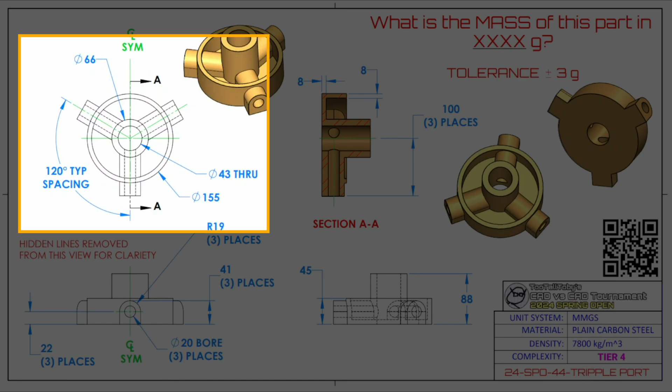We're going to build one of those first, and the easiest one to work off of, based on symmetry, is this vertical one over here. We'll build this one by looking at it from the front perspective, and then use the circular array tool to make 2 other copies of it.

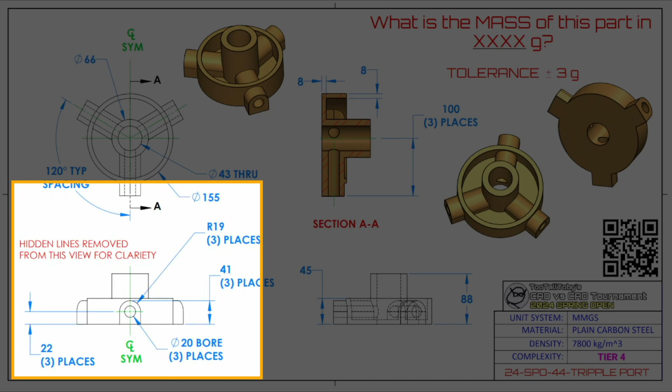If you look at it from the front view, notice it also has this rounded shape with a radius of 19. The easiest way in Plasticity to build these kinds of shapes is to use a rectangle tool, then fillet the corners. So that's what we're going to be doing over here.

So once that's done, extrude one of the spokes, use the radial array to make 3 of them, and then just add the holes from the top and from each of the spokes, and that'll be the end of the model. So with that in mind, let's get started.

The first thing we're going to do is switch to the top perspective. My shortcut is Control-2, but that's a custom shortcut. If you need to know how to switch to the top perspective, you can always access it using the search menu by pressing the F key and searching for 'top'. Here we can see that 'viewport navigate to top' is what we want, so that's what we're going to do.

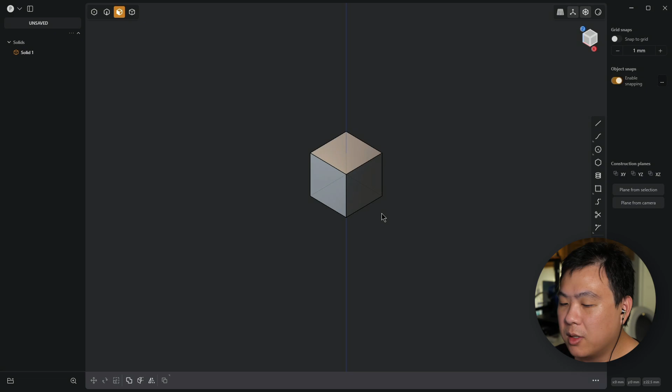First, clear the solid from the scene and switch to the top perspective. Here we're just going to enter in all of the circles that we see. Using the center circle tool from the side, click on the center circle tool, click on the origin, then press tab and enter 66 as one of the circles.

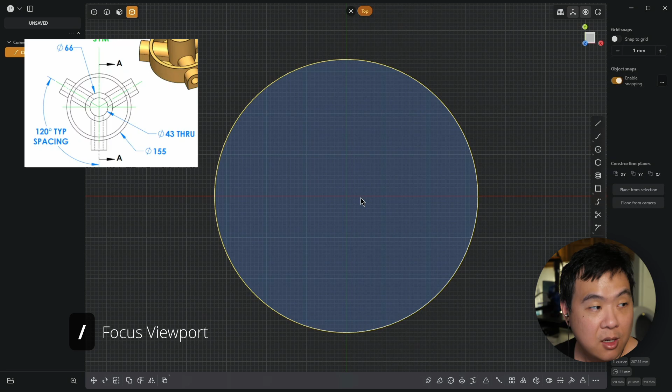I'm going to press / now to zoom in because it was a little too small. Now zoom out, and using the center circle tool again, define the outer ring, which is given a diameter of 155. Press tab and enter 155, then enter twice to confirm.

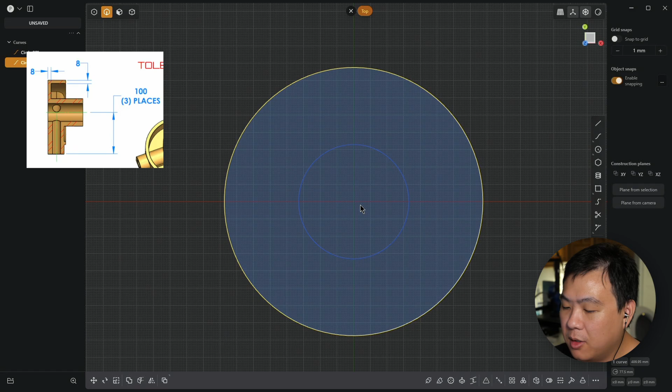We're not given the diameter of the inner ring directly, but from this separate view, we're given that there's an offset or shell of 8 millimeters — offset from the outer shell or outer circle. Switching to edge selection mode, press 2 or use this top left button. Select this shell, press O for offset, D for distance, and enter 8. Notice how it's going in the wrong direction right now — it's offsetting outwards, whereas we want to offset inwards. To fix that, we press the minus key, which flips it in the other direction, then enter twice to confirm.

And then the last thing is we also want this 43 diameter through hole.

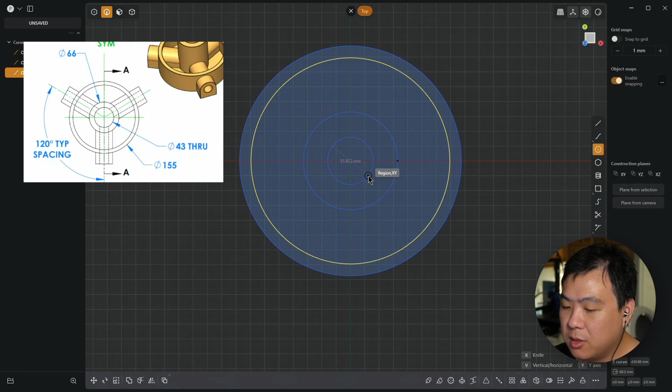So we're using the center circle tool right from the origin, press tab, enter in 43, and then enter twice to confirm. Now to start extruding, what we're going to do is create this 8 millimeter floor.

To do that, I'm going to use face selection mode. I'm going to select these inside faces, press D for distance, and enter 8. Next thing is this outer ring over here.

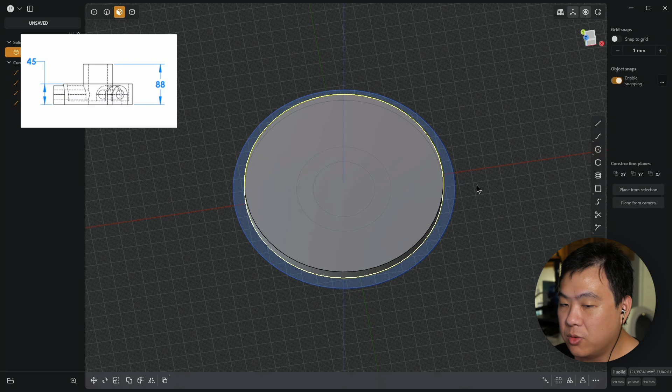From the side profile, we're given that this ring is of height 45. So using face selection again, I'm going to select this outer ring, press D for distance, and enter in 45.

Now I'm just going to rotate to the bottom view so I can select these two inner faces over here. We're going to extrude that inner cylinder. So in face selection, I'll select these two faces and press D for distance. We're given that there's a height of 88, so I'm going to enter 88.

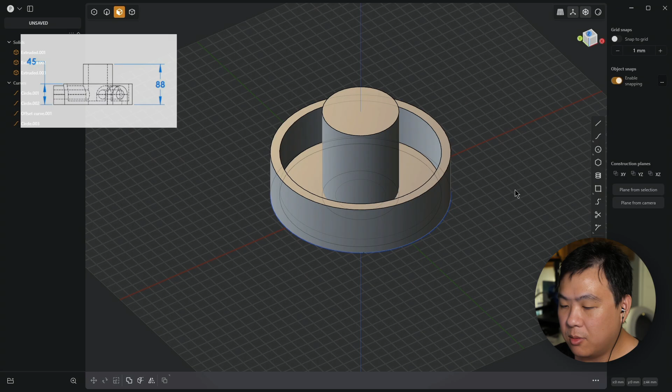And that's pretty much our main shape. So before we move forward, I'm going to press A to select all of our solids, Q for Boolean, Q for union, and right click to confirm. I can now select all of the curves over here and press X to delete them.

Now what we're actually going to do is hide the solid and switch back to the top perspective. Now we're going to construct one of the spokes. Like I mentioned before, we're going to do the one that's vertical.

The easiest tool for me, if we were to do this in a speed modeling competition, is to notice that it sits right along this origin over here, where it's split in half by the y-axis. So the easiest way to make that would be to use the center rectangle tool.

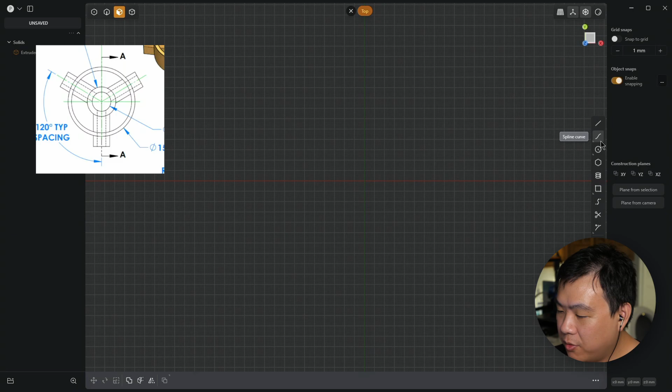Over here, where the corner rectangle is, press on this tool, click on the origin. But notice how on the bottom there's a shortcut that says C to switch from corner to center. So I'm going to press C to make it a center rectangle.

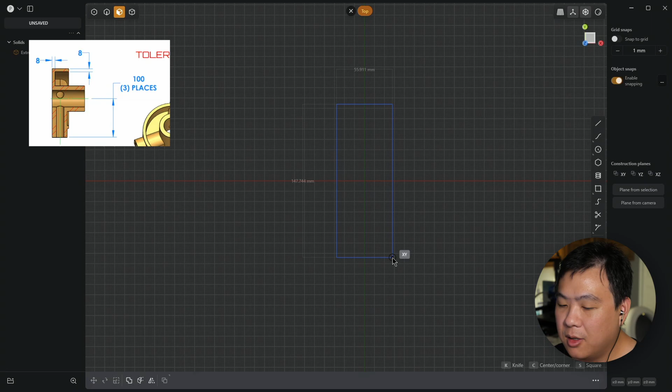Here we're given that from the origin, there's a height of 100. But since we're dealing with the center rectangle tool, we need to double that amount. So press tab and enter in the height of 200 instead.

Now for the width, we're given that there's a radius of 19 for those rounded corners. This just means that if you were to draw a circle, 19 would be the radius. But that also means that to get the full width, 2 times the radius would be the diameter, which is the width we need. So here we just enter 19 times 2, or we can enter in 38, and then press enter twice to confirm.

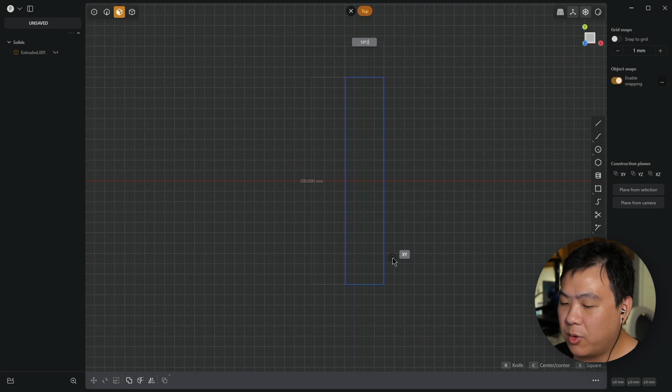Now, I only use the center rectangle tool because it helps us get it into the correct place faster, but we really only want to deal with this bottom half.

So just using the line tool over here, or Shift A, we'll select the line tool and right on the x-axis, I'm just going to cut this rectangle in half. I'm just going to use this half over here.

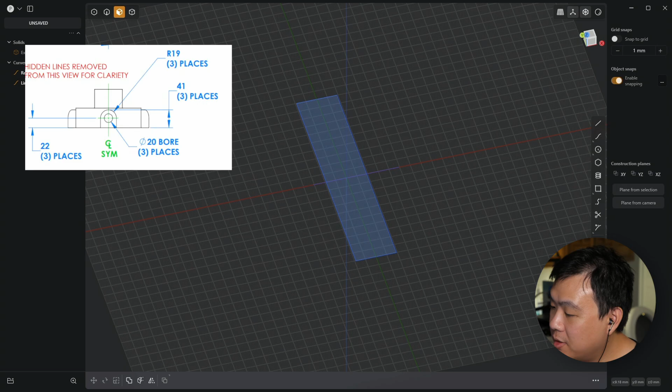Here we're given that, if we look at this view over here, the height of this is 41. So using the face selection tool, I'm just going to select the bottom half of the rectangle, press D for distance, and enter in 41. Press enter twice to confirm.

I can now unhide that other solid that I have. And this is sort of what we need, but we need to make those rounded edges, of course.

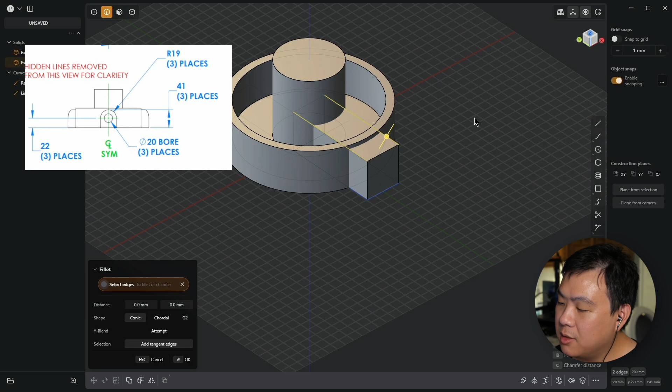So switching to edge selection mode, or 2 for the hotkey, or you can press on the button up here for edge selection, select these 2 edges and then press B for fillet, D for distance, and enter in 19. And that gives us our shape.

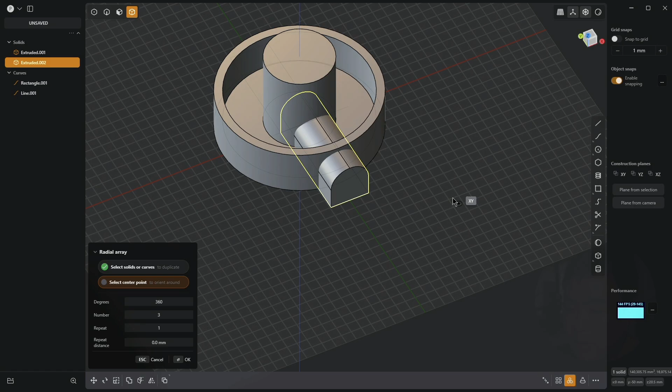Now what we need to do is use the radial array in order to produce 2 more copies of this. So using the object selection or body selection, or press 4 as the keyboard shortcut, I'm going to select the spoke, and then on the bottom right over here, there's this radial array, and press on that button. I'm going to select the Z-axis, which is what I want to revolve around.

Notice that mine's already at 3 because I built this model before recording this video, but the default might be 8. So here you just need to hold down, as indicated on the bottom right over here, Shift and then your mouse wheel down to subtract, until you get 2 additional copies, and then left click and right click to confirm.

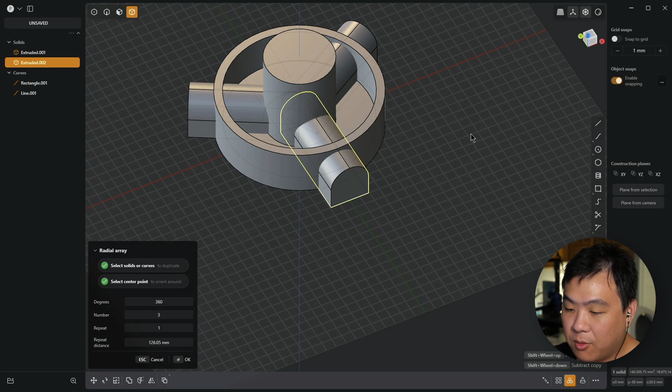So now before doing anything, I'm going to select all of the bodies and Boolean them together. Press A to select all of the solids, Q for Boolean, Q for union, then right click to confirm. Now notice that you have 1 solid.

The next thing we're going to do is create that 43mm through hole on the top. Using the center circle tool, hover over the center of that top face until the white outline is shown in the middle cylinder. Click, press tab, enter in 43, then press enter twice. Once you press enter twice, the circle is automatically selected.

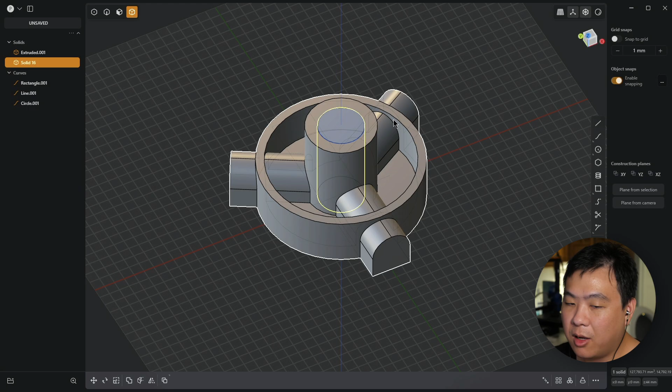With the circle selected, I'm going to press C to enter the cut menu, select the body we have, and then right click to confirm. Once that operation is done, it cuts this inner cylinder out from the solid and has it automatically selected. So with the cylinder selected, just press X to delete it.

Now the last thing is to make these through holes from these spokes. Switching over to the front view, I'm going to use the center circle tool again, making sure it's aligned to the bottom of center, because we're given that we need to create a 20mm diameter bore, offset from the bottom by 22mm.

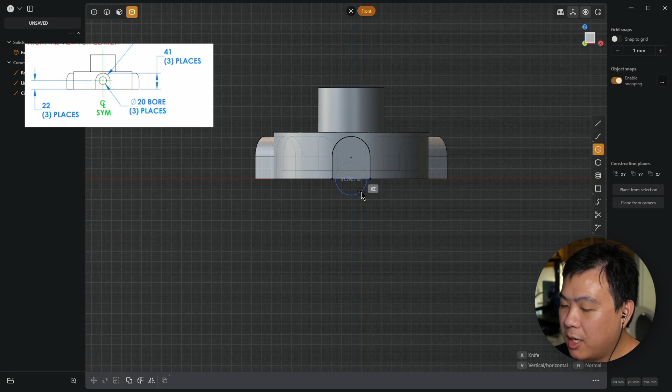So we're going to start off at the bottom center, click, drag, then press tab and enter in 20. And then we also need to move it up 22mm. So press G to activate the move tool, Z to lock into the Z axis, enter in 22, then press enter twice to confirm.

Notice how the face is not blue right now. That's because right now it's aligned to the origin. We actually want to move it onto this face first. And then the quick way to get 2 more instances of that is the tool we used before, the radial array.

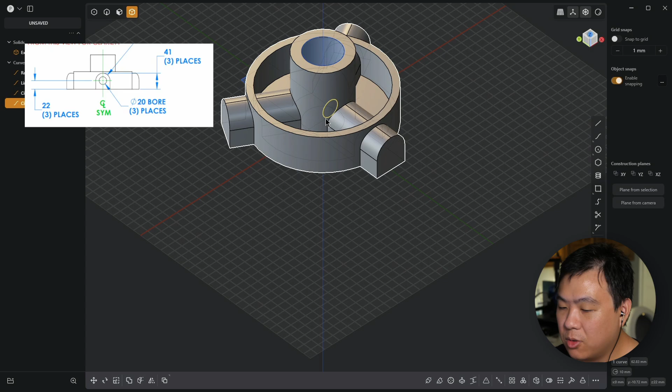With this circle selected, I'm going to press G to move, then just drag this green handle to start moving it along the y-axis. Holding down control, I just need to hover over this face to get it to snap right onto this face. Left click, then right click to confirm.

With this curve selected, we're now going to use the radial array. Similar to before how we created 2 more instances of the spokes, we're going to create 2 more instances of this circle curve, and radial array it around the Z-axis. This time it'll already have 3 pre-selected because we used 3 from before. So I just need to left click, then right click to confirm.

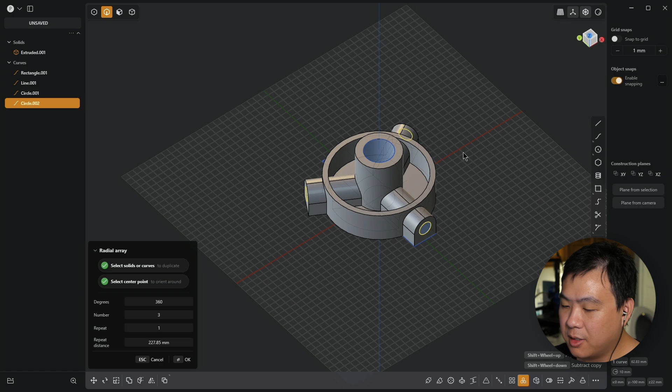So the last thing we need to do is subtract these faces, or extrude cut this face, on all 3 of these spokes. I don't think there's a simple way to do that, so we just need to select the face one by one. Here in face selection, I'm going to select this blue face.

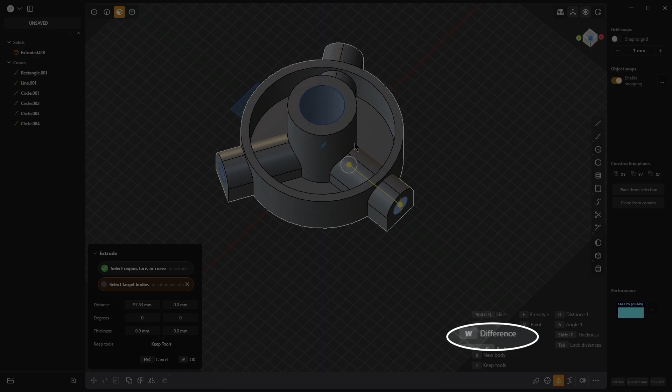I'm going to press D for distance, making sure that it goes all the way to the center and through the center body. Left click, press W for difference, then click on the main body, then right click to confirm. Rotating the camera again, we're making sure that it cuts all the way through the center. Then we repeat that for the other 2 spokes.

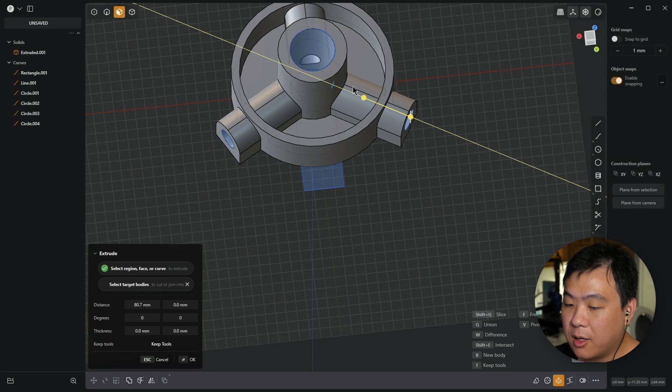D for distance, left click, W for difference, left click on the model, right click to confirm. And then lastly, this one: select this face, D for distance, drag it all the way into the center, left click, W, left click the model, right click to confirm. And that is our model.

Just double checking that the hole went all the way through, and it sure did. Now to calculate the mass, using the body selection tool, we're going to select this main solid. On the bottom right there, it gives us the volume.

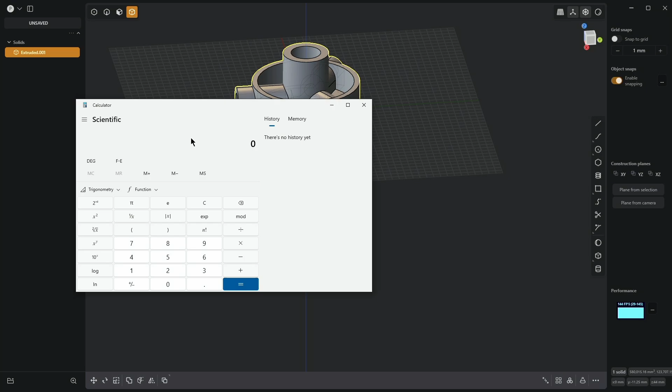And opening up the calculator, we enter in the volume, which is 580,015.16 millimeters cubed. And the density from Too Tall Toby is 7,800 kilograms per meter cubed. So we're going to multiply this number by 0.0078, which gives us our mass of...

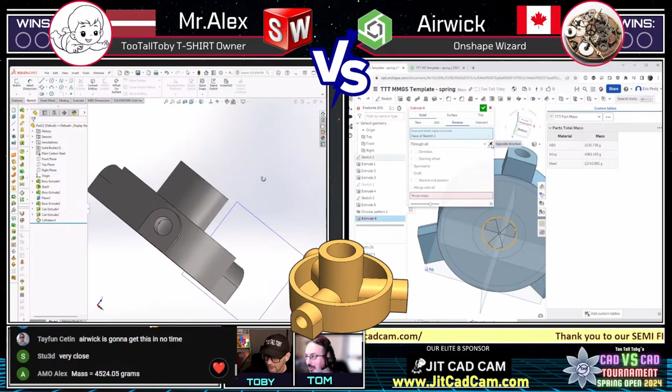And MrAlex comes in with an answer: 4,524 grams. And that is correct.